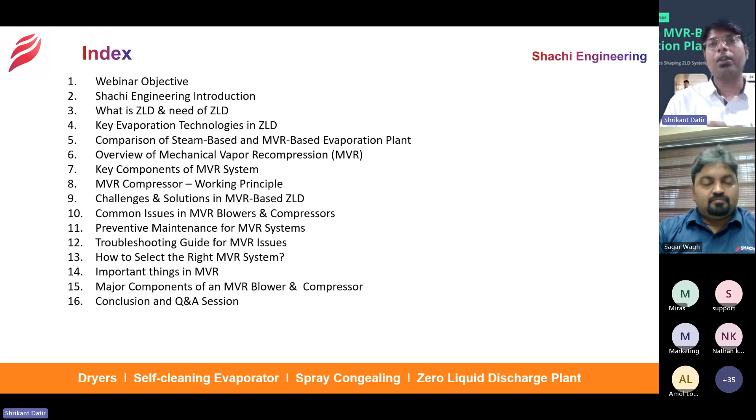We will highlight all this here, for all our users to get more depth about what kind of components are there in the MVR-based blower and compressor, and then the conclusion and Q&A. Let's dive into the discussion.

The objective of this webinar is to provide you insights on the working principle of the MVR-based system, the key technologies, and the advantages of the mechanical vapor recompression zero liquid discharge plant. Also to give you a complete OPEX point of view with transparency, giving a comparison between both conventional and MVR based evaporation plant.

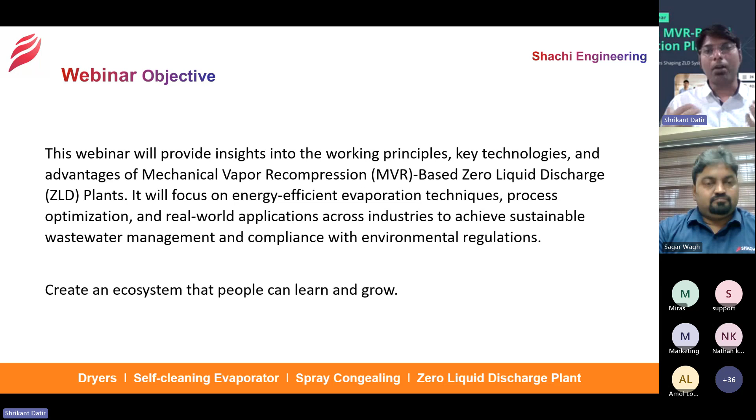The main objective is to give you more insights about the MVR based zero liquid discharge plant, so that you can get to know what exactly the MVR is, what kind of components are there, what is the selection criteria, what are the problems and troubleshooting. That is the main focus here. And the last objective is to create an ecosystem where people can learn and grow. As we are also evolving with the knowledge, we are supplying the systems, so we want to pass that on to all our customers and our audience.

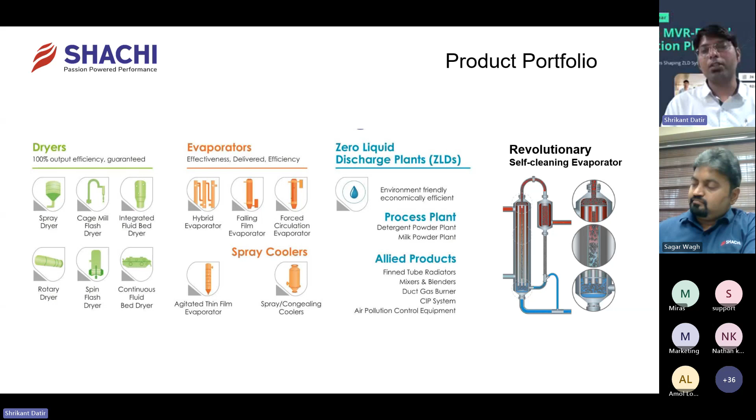Let's move ahead with a quick intro about our company. Shachi Engineering is a 26-year-old organization that deals in evaporation and drying technologies. We have two business verticals. One is Shachi Process, where we handle process equipment like dryers, spray dryers, spin flash dryers, integrated fluidized bed dryers, flash dryers, cage mill flash dryers, spray coolers, spray congealing plants, and bedding plants, along with evaporation plants for product applications such as falling film. Those come under the process vertical. The environmental vertical handles complete end-to-end solutions for the industrial wastewater segment, including conventional steam-based multi-effect evaporation plants followed by ATFD to achieve ZLD, and MVR-based evaporation plants for achieving zero liquid discharge. So this is the quick intro about Shachi.

When we talk about a zero liquid discharge plant, what exactly is ZLD? In short, we can summarize that when any facility is a ZLD facility, not a single drop of wastewater should come out from that facility. That is when a facility is called a zero liquid discharge facility. There are various means and ways of doing that. Some people do it in-house, some go for common CETPs for the industrial segment. But now the government has mandated that every industry should have ZLD, and that's what we are giving solutions to our customers for, so they can achieve efficient and reliable ZLD, because this is the most complex plant in their whole facility from an industrial wastewater treatment point of view.

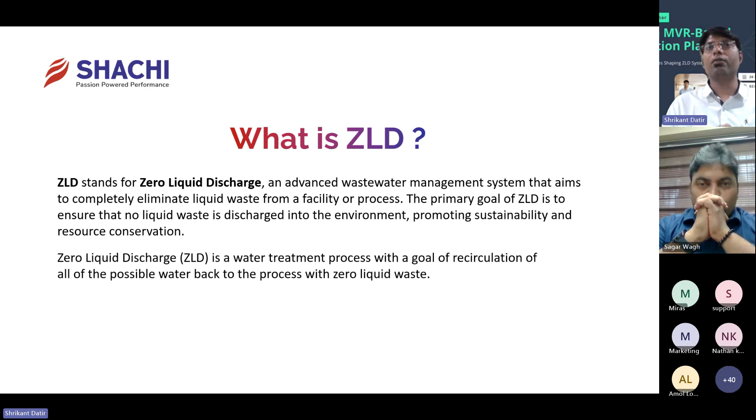The key evaporation technologies - as we discussed in an earlier webinar, there are two main technologies. One is the steam-based multi-effect evaporation plant, where you go for concentration using a continuous heat source like steam or another heating media for evaporation. The second is electricity-based, which is mechanical vapor recompression - ZLD with mechanical vapor recompression. This is what we are focusing on today, how we achieve ZLD with mechanical vapor recompression, what the selection criteria are, and how to go about it.

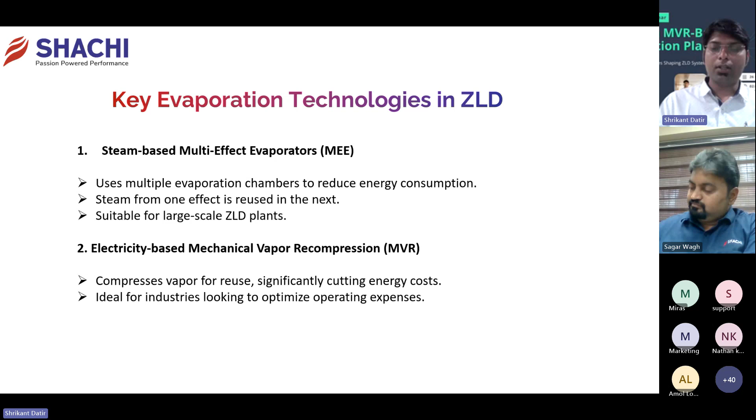Before moving directly into the MVR-based evaporation plant, here's a short brief and comparison to give you clarity on the MVR-based system versus the steam-based system. You can see on screen both kinds of systems, TVR as well as MVR. On my left hand side is the TVR based evaporation plant, where motive steam is put into the system by means of a thermo vapor recompressor, requiring a continuous heat source for evaporation. In the MVR based system, the vapors generated from the system are put into the mechanical vapor recompressor, get heated up again, and that heated vapor again acts as a heat source to the plant. This gives efficiency and reduction in OPEX. This is just a pictorial representation for clear differentiation - the rest of the configuration remains the same, with no change in plant configuration and construction. Only the heat source and mechanical vapor compressor implementation differ.

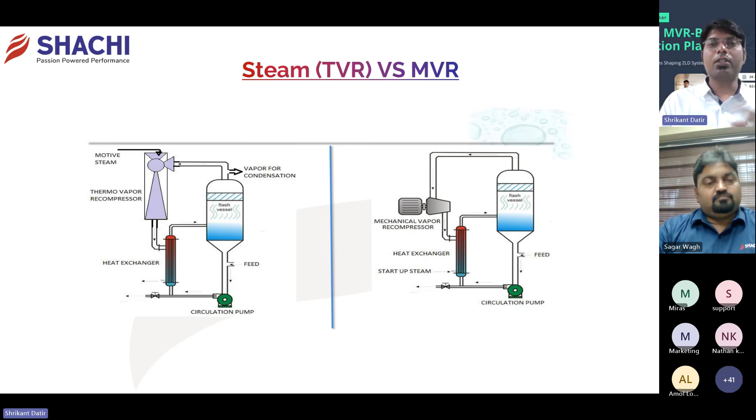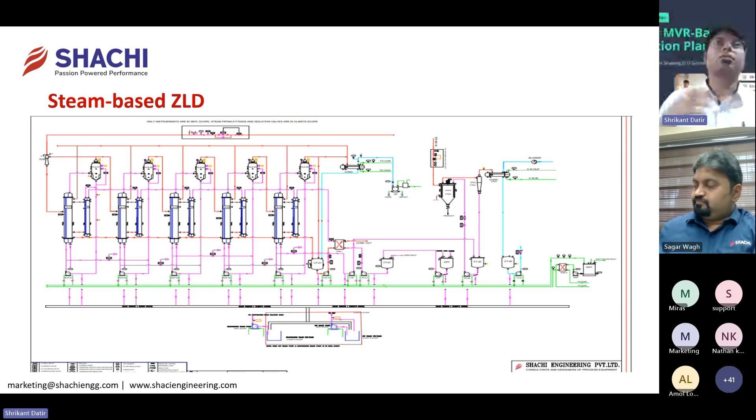We'll discuss this more when we go to the main MVR based discussion, because this was also part of the last webinar. I want to give you a brief elaboration on that part so you all get a refresh, so that we can move and jump into the MVR based evaporation plant discussion.

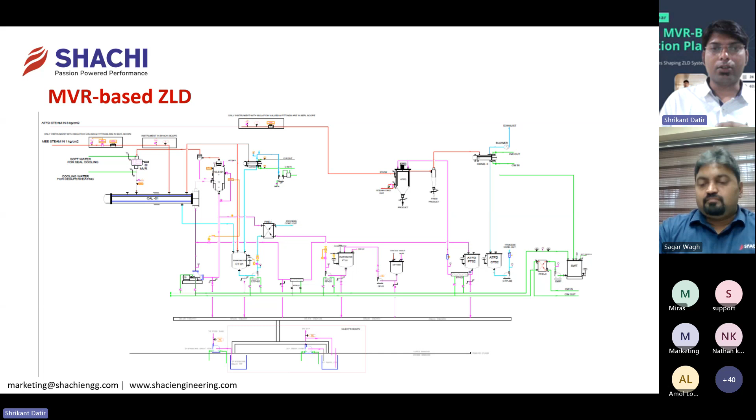So this is the point wise comparison between steam based evaporation plant and mechanical vapor compression plant. Here we've given the comparison between triple effect evaporation plant followed by ATFD and the mechanical vapor compression evaporator followed by ATFD. We've already seen in pictorial representation how it works - steam is needed continuously through the TVR, and here the vapor gets compressed by means of MVR. As for energy source, high pressure steam is needed for the steam based plant, whereas electrical energy is needed for the vapor compression.

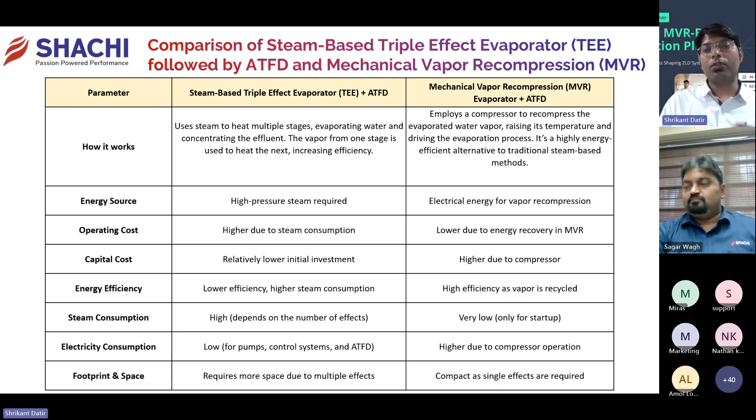If steam is available, you can also use it for the startup of mechanical vapor recompression. So operation cost is higher with the ME plant and lower in the mechanical vapor recompression plant. This complete bifurcation for capital cost, energy efficiency, steam consumption, electricity consumption, and footprint was discussed in detail in the last webinar, which was more focused on the overall ZLD.

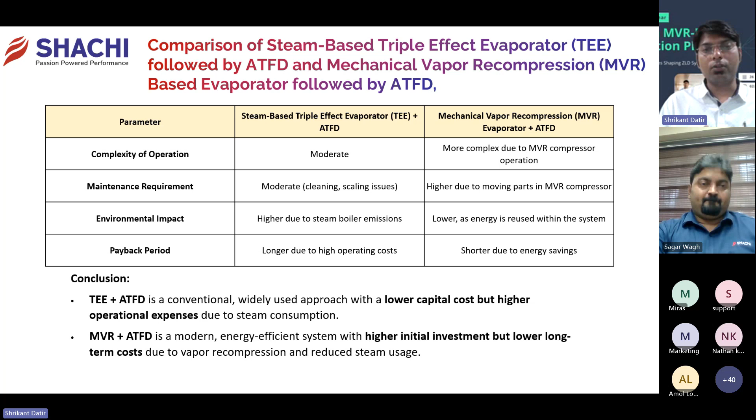Now as we are focusing on the core of MVR based systems, I will move very quickly because we have time constraints. So I'll move fast towards the mechanical vapor recompression design.

Before going into the discussion, here's a brief comparison of OPEX, since a lot of customers ask what kind of differences they can get in OPEX on a per meter cube cost, or per kg of evaporation cost, compared to the steam based evaporation plant and the MVR based evaporation plant.

So you can see the difference here per kg of evaporation - around 1.1 rupees per kg of evaporation cost for the steam based evaporation plant. Here we've considered the comparison between a 60 KLD capacity plant, steam based and MVR based, followed by ATFD.

ATFD remains the same here, so you can see almost 50% reduction in OPEX. In this OPEX consideration, we've only considered power, steam, and nitric acid for the CIP, and hydrojetting once in 3 months - these scenarios we've considered for the OPEX calculation.

Manpower cost is not considered in this OPEX because it varies based on the customer location, premises, and their operating philosophy - that's a variable cost. But considering the main fixed parameters of power, steam, nitric acid, and hydrojetting, this much difference you can get in operating cost.

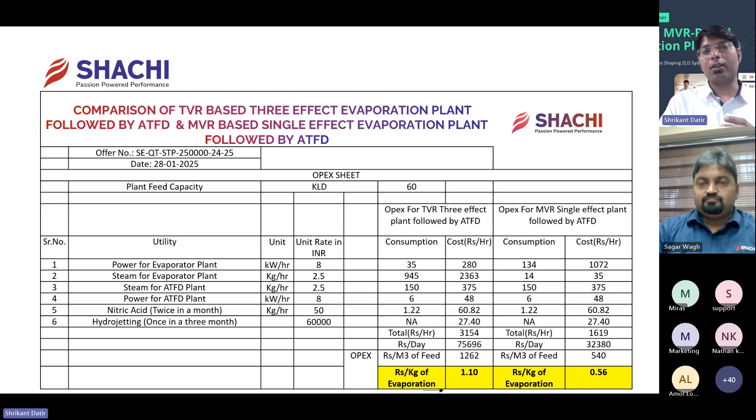But of course, the main headline generally when discussion comes on the table for steam based versus MVR based is that CAPEX is high for MVR and OPEX is low, whereas it's the vice versa for steam based operation. So I just wanted to give you clarity on how the OPEX moves. Later we are typically going to discuss the MVR based plant only, not the steam based plant.

So here's the overview of mechanical vapor recompression systems. MVR is a thermal evaporation process that recycles heat from vapor - that's the main thing MVR is known for. It reduces energy consumption compared to traditional evaporators, and is used extensively in ZLD plants for water recovery and crystallization.

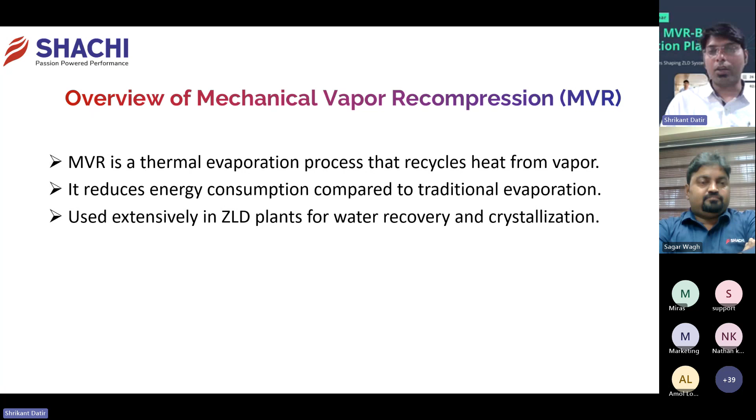When it comes to the overall plant point of view, this overall ZLD plant by means of MVR based operation has complete components in totality. Sagar sir, can you give more insight on that plant - what the totality of the plant will look like, what equipment is there, and what differences there may be on the equipment point of view between steam based and MVR based operation plants?

Thank you. Before going for the detailed discussion on MVR based system, I want to inform you all that just like the multi-effect evaporator, pre-treatment is very much important in this case also. Both systems are almost similar - you have to do pre-treatment before feeding effluent into the MVR-based system. Because if you don't pre-treat it, it also creates problems in the MVR system.

If you compare the MVR-based and steam-based system, all other equipment are almost same. The main heat exchanger like calandria, preheaters, pumps, recirculation pumps, feed pump - everything remains same. Only the main component that differs in both systems is the MVR compressor.

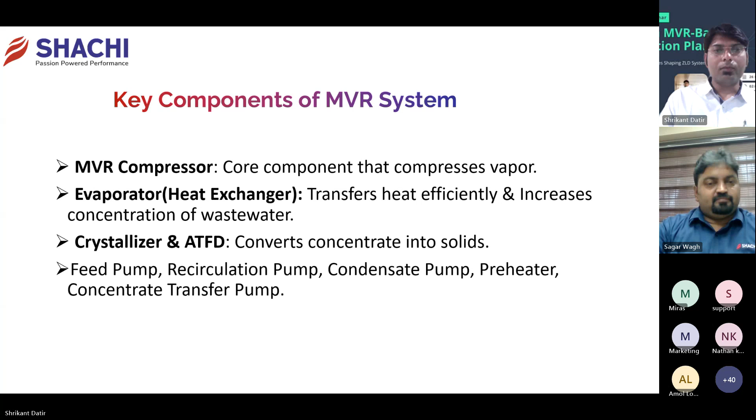One more thing I want to highlight - directly starting the MVR compressor will not serve the purpose. You have to generate initial vapor in the system, and that is done by either using an electrical heater or steam. For low capacity MVR systems, you can use electricity, but for higher capacities we have to go for preheating by steam. That is an important factor.

The next slide is about the MVR based compressor and its working principle. In totality, if you can explain how basically the MVR based evaporation plant works, and how the MVR specifically covers the operation point of view, that would be very helpful for all our participants.

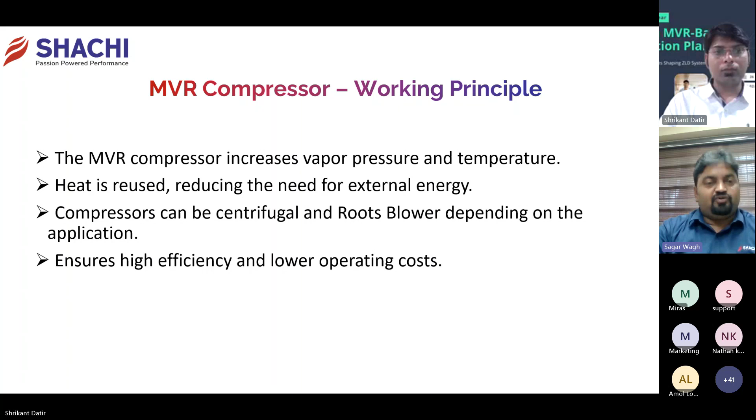Initially your feed from the feed tank, by using feed pump, goes into the preheater. Preheater is the plate heat exchanger, PHE, that we generally use for preheating. In this preheater, initially you can use hot water - that hot water is generated by using electricity, by electrical coil, and that hot water is used for preheating.

Once vapors get generated, they get compressed in the compressor to higher temperature and higher pressure. So that hot vapor, with high pressure and high temperature, again goes into the shell side of the calandria, which heats the incoming liquid in the tubes. This will continue, and you will get the desired concentration in the calandria, and that higher concentration, just like in other conventional evaporator systems, goes into the ATFD or centrifuge or spray dryer. So in a nutshell, this is the process working of the MVR-based system.

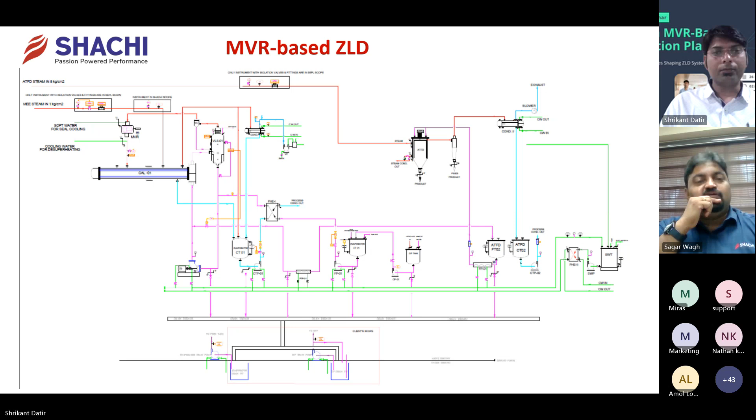So what are the challenges? People are going for MVR. MVR is the new technology development that gives you low OPEX, and that is what everyone is focusing on. But there are challenges in the operation of the MVR-based evaporation plant, in totality in the ZLD plant, and itself there are challenges for the MVR compressor or blower also. So that's what we want to discuss here.

So Sagar sir, if you can elaborate both points of view, first on the challenges in the plant in totality, and the challenges only for the MVR.

Just like in conventional evaporator or MVR-based evaporator, the major issue is scaling and fouling in the calandria. So same thing - if you don't do vapor-liquid separation properly, or if your vapor-liquid separator design is not proper, there are chances of carryover into the MVR blower. So we have to take care of avoiding carryover of particles into the MVR compressor. If you don't design it properly, that entrainment of solid particles goes into the MVR and creates scaling and fouling on the blades. So that is very much important.

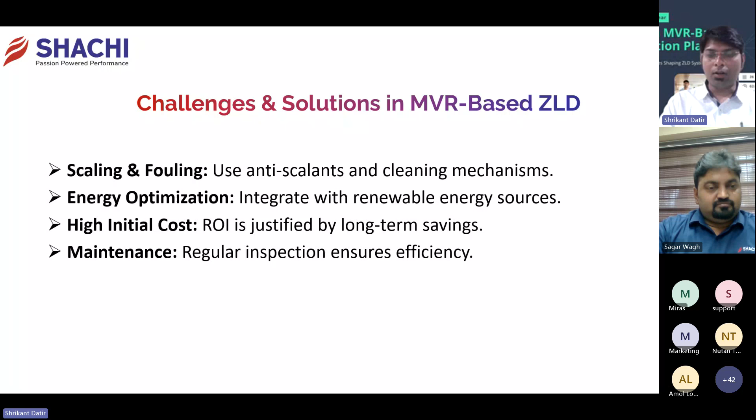Our next slide focuses on the common issues which MVR blowers and compressors face during operations. All the participants attending the webinar, or customers familiar with MVR-based operation, might relate this slide with their day-to-day operations, and the issues they should face. These are the various issues which generally MVR blowers and compressors face during operation. So you can elaborate on this in context of the MVR blowers and compressors.

As discussed in the earlier slide, scaling and fouling is the major issue - salt deposition, which results in lower heat transfer efficiency. Then bearing wear and lubrication issues lead to increased friction and overheating. Vibration and misalignment cause excessive wear and impeller damage. Seal failures and air leakage reduce efficiency and increase energy consumption.

Electrical control failures - voltage fluctuation, VFD malfunctions - and surge and stall, that unstable flow condition, cause damage. Surge is nothing but a lower quantity of vapors going into the MVR, which results in backflow of the vapor, reducing heat transfer efficiency and plant capacity. A stall is nothing but lower velocities on the impeller, which also creates problems in heat transfer efficiency and lowers capacity.

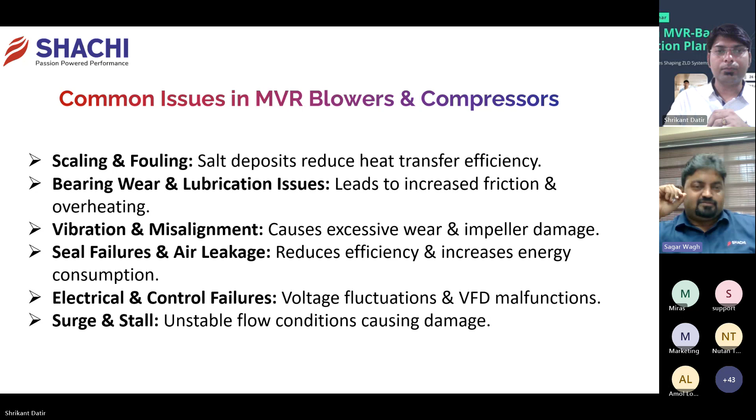So in that case, you have to do vibration analysis design, which we can discuss further in detail. What are the solutions or what care you need to take for all these issues? I'll move forward to the next slide.

From the maintenance point of view, we have highlighted these points about what kind of maintenance needs to be taken care of for the MVR-based evaporation plant. Can you elaborate in more detail on the day-to-day routine operation, when the customer operates the plant, on what preventive activities need to be taken care of with the ZLD operation team?

Yes Shrikant, this is the heart of the overall operator system. Before breakdown, you have to take care of preventive maintenance. Daily checks are very important - you can check leakages, abnormal vibration, and monitor oil levels daily. On a weekly basis, you can clean the filter, check alignment, and tighten connections.

On a monthly basis, you can perform vibration analysis and measure energy efficiency. On a quarterly basis, you can replace seals and conduct ultrasonic leak tests. The ultrasonic leak test is an advanced NDT test to check leakages in the system. It is quite costly, but you can do it quarterly.

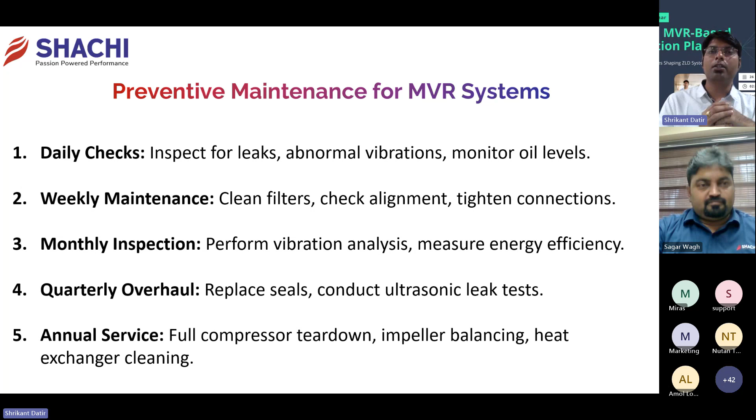If you leave this plant to operate at a normal level without proper care, problems will surely arise. As sir highlighted, daily checks, monthly checks, quarterly and annual checks have to be done so the plant can run smoothly and continuously with the required capacity. I hope everyone gets an idea about these things and looks into this aspect when going for an MVR-based operation plant. It's not only the plant supplier's responsibility, but also the customer's responsibility to maintain the plant operations.

The next point we are going to discuss is the troubleshooting guide for MVR issues. Majority of three issues generally arise on the MVR. We are specifically discussing points related to the MVR blower and MVR compressor. If you have issues related to other parts of the ZLD plant, you can mention them in the Q&A session. The main problems we have identified during operations are high energy consumption, abnormal vibrations, and frequent tripping.

The causes and solutions will be more elaborated by Sagar sir. Sagar sir, please give more light on this part.

As Shrikant said, these are major problems in the MVR-based system: high energy consumption. The causes generally are scaling, misalignment, and poor lubrication of the MVR blower. Solutions are cleaning the impeller, regular maintenance, aligning the shaft, and using correct lubricant.

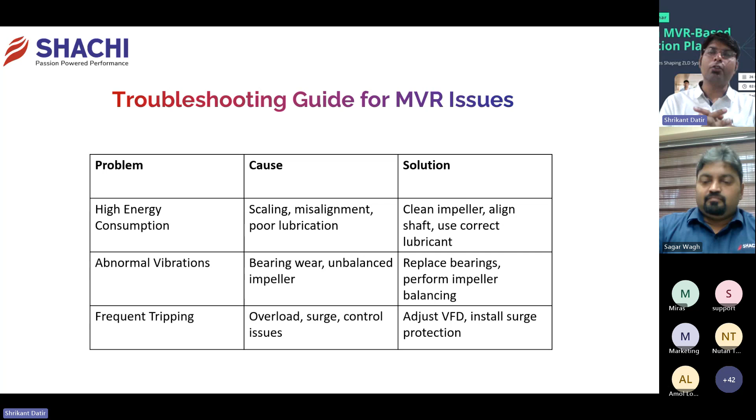So here is the indication for all our customers. Whenever you are going for procurement of the MVR-based ZLD plant, or if you have an existing ZLD plant, you should always procure the complete plant or MVR system with the spare part list by default. It should not be that you purchase the MVR first and go for the spare list later. You should go for the combination of MVR along with the spares, because that is mandatory from the critical equipment operation point of view.

So here is the crux of today's main discussion. For an MVR-based ZLD plant, there is a vast market, domestic and global. There are a number of suppliers of mechanical vapor recompressors offering various types of MVR systems. Some give Roots blowers, some give fans, some give compressors, and so on. But now the question is how to select the right MVR system. This is always the question that arises for everyone, because everyone gives solutions based on their own experience, but what are the actual criteria for selecting the right MVR?

So these points you have specifically highlighted for all our customers and participants, for clarity, so that whenever you come across such discussion it should be very much clear whether the given MVR system is right or not. Sagar sir, this is the main thing where a lot of our customers need more clarity, and if you can give more elaboration on these points, that will be helpful for all of us.

Till now we discussed only the single MVR as a component. But if you look at the overall ZLD system, whether conventional or MVR system, the basic remains the same. The basics, like the material balance, how much quantity of water you want to evaporate, what is your feed, what are its characteristics, you have to do the basic calculations, basic material balance, and select the proper temperatures so that scaling will not happen. Generally we don't go above 100 degrees Celsius to avoid scaling in the calandria, because in both cases the calandria remains the same and your feed remains the same. So basic calculation and basic pre-treatment are very much important.

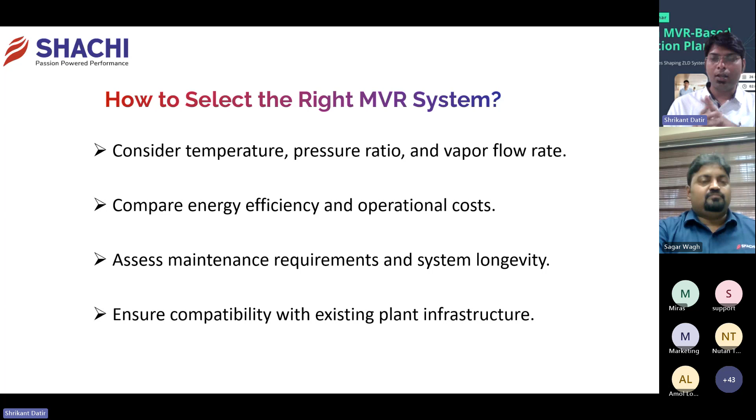Let us go deeper into the most important things while designing the evaporation plant. There are 3 pointers we've identified for MVR: inlet vapor temperature, desuperheating, and the sealing arrangement. Sagar sir, can you elaborate on why these 3 points are so important in MVR? Yes, the first point we already discussed - vapor temperature plays an important role in sizing the MVR blower.

Second most important is desuperheating. When we compress the inlet vapors, they get superheated. We don't have control over that superheating temperature, and superheated vapors create problems in the heat exchanger - reducing energy efficiency and causing operational issues. Preventing overheating of the heat exchanger is very important. Desuperheating enhances heat transfer efficiency, prevents overheating, and protects your equipment - the seals and everything - because superheated vapors can damage the system. We want saturated vapors, not superheated ones. Superheated vapor has lower heat transfer capability compared to saturated vapor, and desuperheated vapor condenses faster, improving evaporator performance. Condensation of vapors is important for heat transfer - liquid comes from your tube and heat transfer takes place as vapors condense. If it's superheated, condensation is difficult, so we want saturated vapor, not superheated. That's why we have to do desuperheating of these superheated vapors.

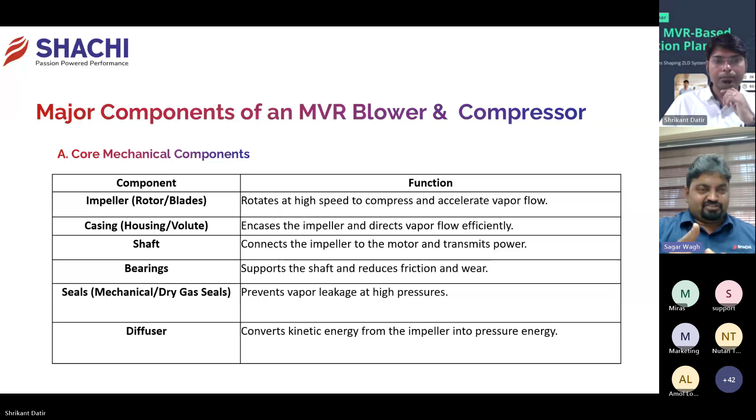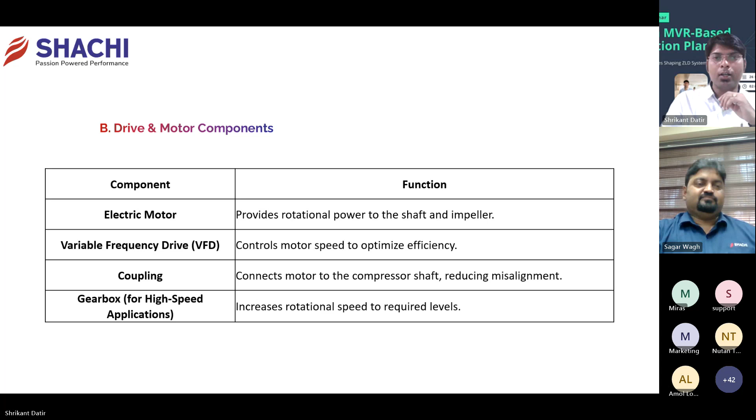So those are the constructional aspects of the MVR based plant. I'll move towards the conclusion of the presentation. In today's discussion, we can say the conclusion is MVR based ZLD plant is the future of sustainable wastewater treatment, because we are looking forward to energy efficient systems, so MVR is one of the best options for industrial wastewater treatment.

But yes, there are always pros and cons for every system. This system also needs to be made much more robust as compared to the conventional system. A lot of things need to be taken care of. The plant needs to be operated with whatever pre-checks we discussed, whatever design considerations we discussed - if you implement all those things at one place, then you can go with the MVR-based ZLD plant, and surely that is the right choice for sustainable wastewater treatment.

And advances in compressor technology are also needed, because reputed suppliers all over the globe, and Indian suppliers also, are going for advancement. They are researching this plant and hoping to get more advanced technology from the suppliers so that energy efficiency can be improved further compared to the present situation.

And the integration with AI and IoT can enhance the monitoring and performance. This can be the tool which we think will take place in future MVR-based systems, because AI along with IoT surely plays a key role from the operational and monitoring point of view, and also for data extraction and data maintenance. This is all needed for that particular point.